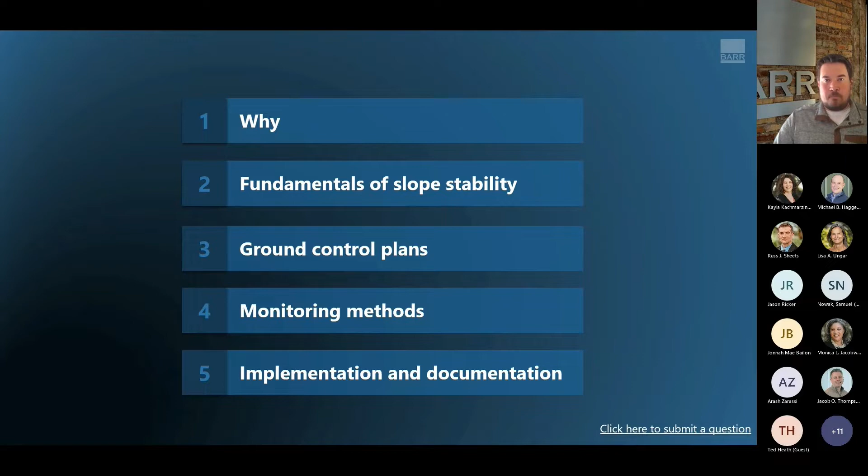As he said, we're going to be focusing on what you need at your operation. So we're looking at your day-to-day staff, your supervisors, your leadmen. We're not going to dive too far into the technical aspects of geotechnical discussions. We really want to make sure we line you up and communicate some tools that you all can use, and hopefully are readily available to you at your operation.

We're going to talk a little bit about the why. Why are we here? Why is it important? Why do we need to be concerned about geohazards with regards to keeping our folks safe? A little bit on the fundamentals, what sort of slope stability issues you may encounter depending on if you're sand and gravel or rock quarry.

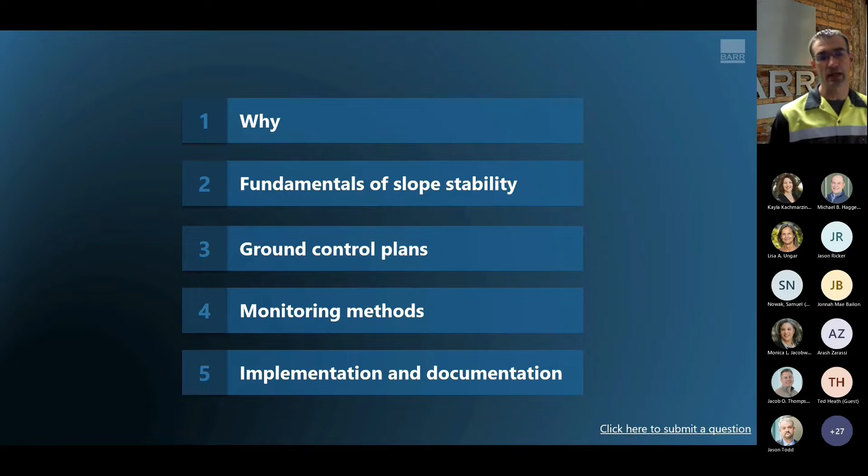Then we'll transition over. Mike will take over, talk a bit about ground control plans and some of the regulatory aspects. We'll share some examples of monitoring methods and then dive in at the end: okay, you've done all this stuff, what do you need to do to implement it and use it at your operation?

So we'll start with some of the why. When it comes to ground control in the mining industry, regardless of your scale, when you're looking at the geohazards of keeping folks safe, we consider that it's not a matter of if, but when a slope failure or slope movement can occur. We may be thinking large scale movements are the ones at risk, but in general that could be a large scale movement down to rockfall, gravel, local sloughing. We see some of this stuff day to day.

There's inherently always going to be some movement as you're exposing ground conditions, opening it up. Usually our bench faces are a little steeper than the natural condition was. We're going to see something raveling off, and it's understanding what's the type and scale of risk we could have from that. Now, the fortunate thing is we can all keep going. We can keep our folks safe. We can continue to mine as long as we have the practices and the controls in place.

We know what to look for, and importantly, when we do see those changes in conditions, we know how to respond, how to react. Is that fixing the instability with some earthwork, or are we just going to berm off, barricade the area, step back a bit, let it do its thing, and then move on from there? How do we mitigate it, making sure we keep folks safe.

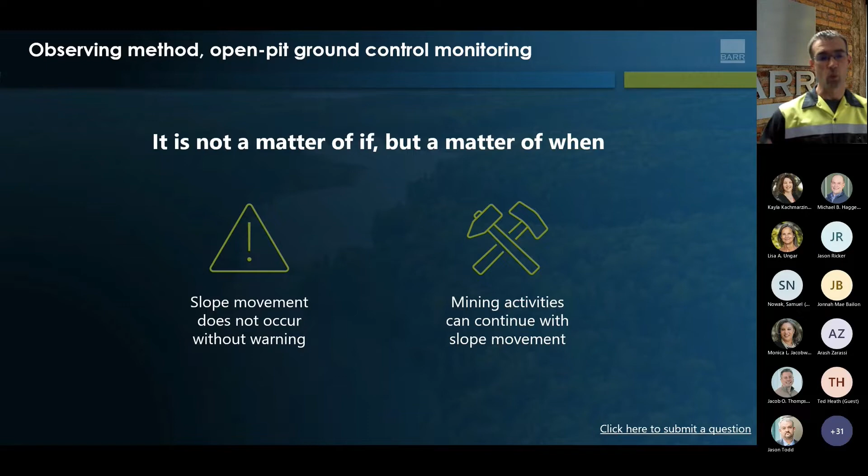The benefit here is with all slope movement that occurs, there's going to be signs, whether it's that crack, the sloughing, the raveling. Now, the one catch is what's the time period? Depending on your ground conditions, maybe that ranges from hours to years, slow moving, large scale. But in all cases, we can keep going. We can keep folks safe as long as we know what we're looking for, we know how to respond, and we have that plan in place for when those conditions occur.

Now, a little bit of an example of a not if but when case. This is a larger scale coal operation, but as we can see here, we've had a significant movement. So it's not just the hazards that slope movement can cause to your personnel, your equipment, your operation, but then it's the impact on the business side of the mining.

So you've developed a plan, you have a specified working room, and you have a larger scale slope movement that pushes in, reduces your pit width or your working area. In this case, it essentially creates a pinch point because it's a narrow pit. So folks' only way in or out is working laterally. But you see large scale movement here, the pit wall moved out at least 100 feet, pinching that pit floor.

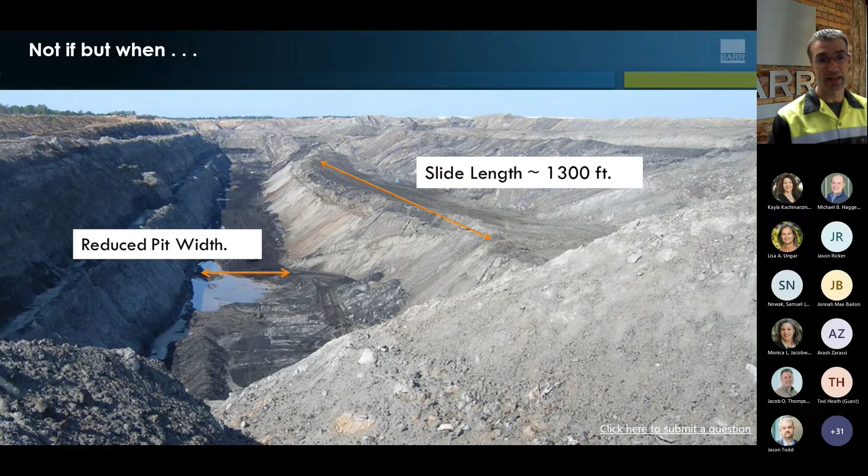Then you get into the regulatory aspect: even if you were aware of it in advance, if it is a significant movement, you can get MSHA involved. In this case, they issued a K order on the operation, which, although no one was hurt, specifies their control of the process, what you need to go through and what they need to approve before you can safely get back to operation. Now, as I said, the biggest thing with ground control issues is what type of rock or soil you're dealing with.

And this can bring in kind of a case-by-case basis. There's a lot of geographies that I know many of you in attendance may be working in. And it's knowing and understanding that, okay, maybe some of the issues, some of the risks, some of the methods that maybe at some point in your career you saw applied at one location, one operation, maybe they don't entirely fit the next one. There may be something that'll work better. And that's hopefully what we get into, just the methods that you can try and plan ahead prior to a ground event occurring, trying to keep it from being an unexpected impact on your operations.

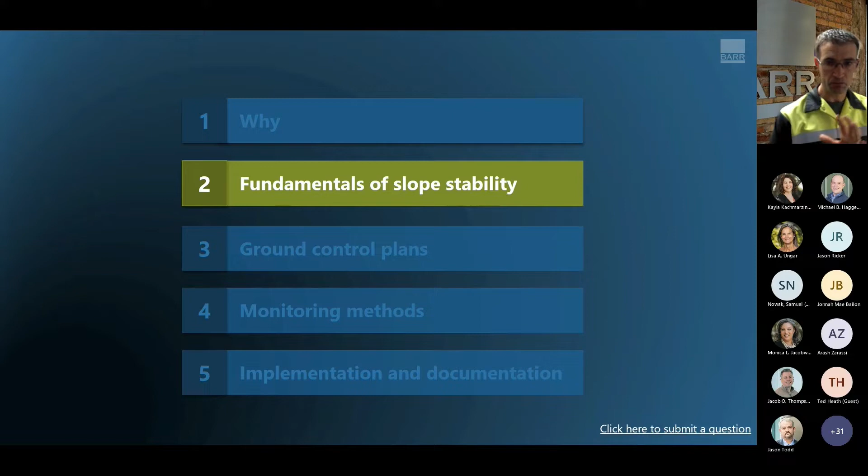So now we're going to jump into a little bit of the fundamentals. And like I said, we're not going to dive too much into technical, but we just want to set the framework for, well, why are we here? Why are we talking about this? Why is this important to you?

So when it comes to designing any size pit, general concept is we know there's more minimal exposure compared to, say, a large earthen or concrete dam, a skyscraper. You get into some other industries, aviation, where failure because of that exposure to the public is just not acceptable. The public expects everything to be safe, stay safe, no issues. And an aspect of that is your general person doesn't know what to look for, say, in a dam inspection.

Whereas comparatively, mining industry, we've got a lot of pits. Conditions are constantly changing. We're either expanding, laying back a pit, or we've mined out an area, closed it, reclaimed it, and we're on to someplace else. Maybe depending on the size scale of your operations, maybe it's a few months to every couple of years. And you have the equipment there to address issues when they occur.

And the staff, that's part of all our MSHA training, is ground control. What do we look for? Make sure we get it reported. So although the risk and the probability of almost certainty that you're going to have some size aspect of failure, you have a lot of the controls in place to make sure it's not going to have an adverse impact. And this is an important key.

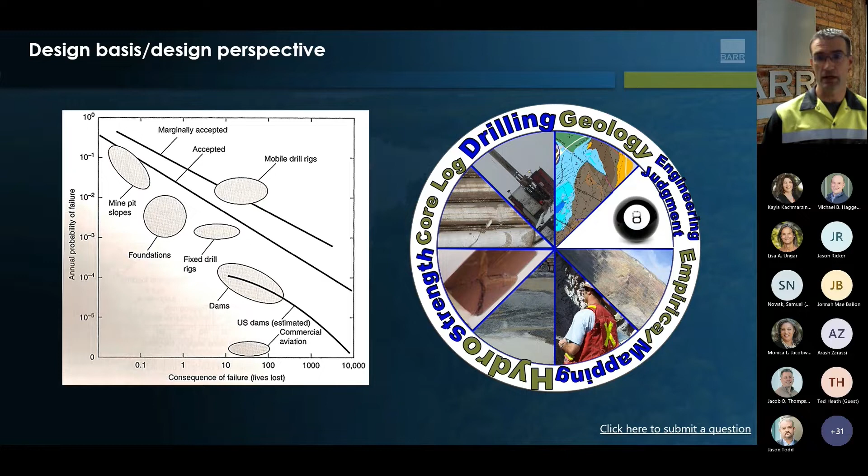And then, what's not shown here is just the operation. Well, how do you drill? Do you need to drill and blast? How do you drill and blast? What kind, size, type of equipment are you using to excavate? Just any number of these factors that can impact what we're doing.

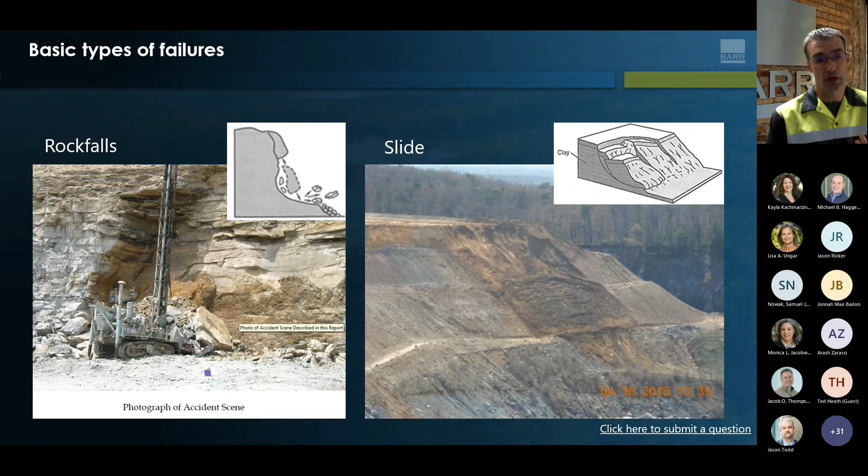Example on the right, more of your soil, granular based material, just an overall slide slump, waste dump fill material here. A shear failure that can cause that to slide out as it locally tries to develop its own angle of repose if it had been constructed too steep.

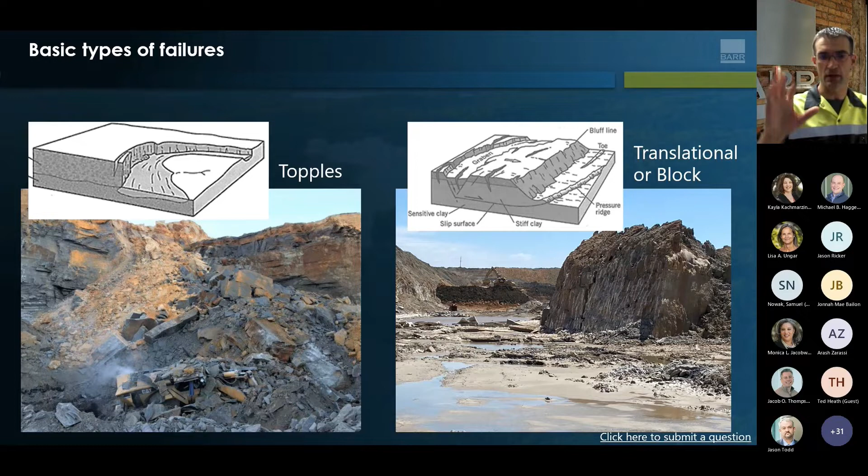And then the last one we'll just show here as an example is that translational large block, kind of like a slide. Example here, we've got some cracks, they actually show heave, where the floor of the pit is starting to try and push up, heave up. We've got a massive block that's sitting on a weak zone, a weak layer, and it's able to translate and slide into the pit, into your area of workings.

So with that, I'm going to transition. I'm going to hand it over to Mike, and he's now going to take this the next step through your ground control plans, as well as some of the regulatory aspects of this.

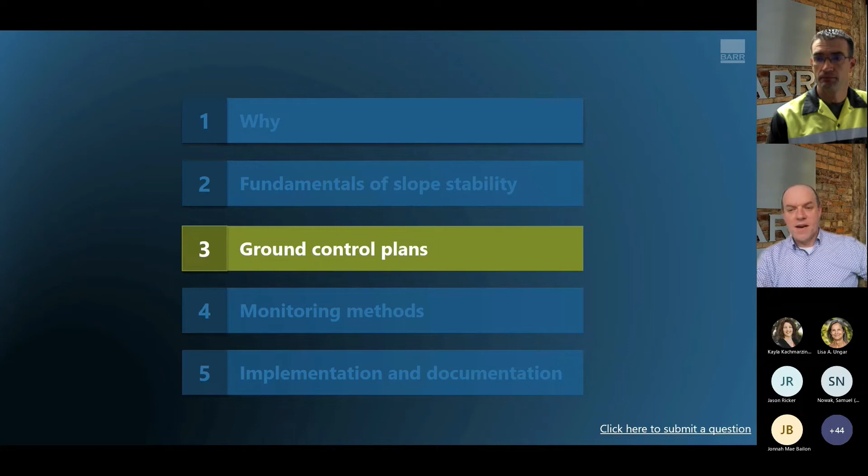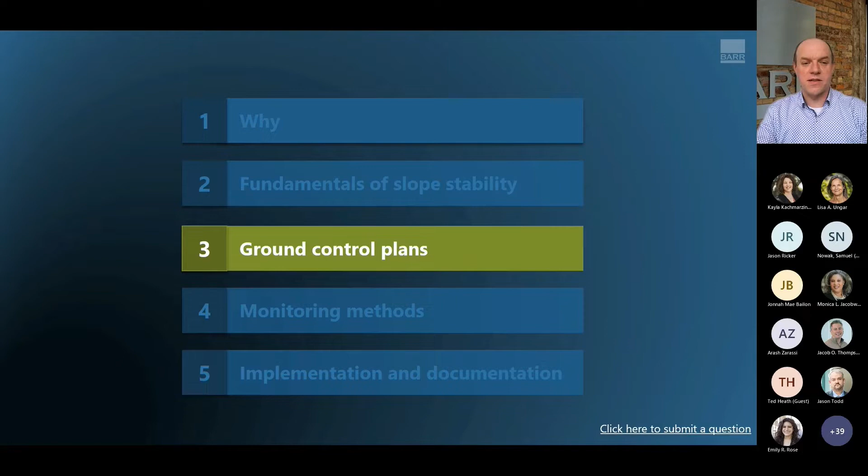Great, thanks, Russ. As Russ mentioned, I'm Mike Haggerty, and I'm going to be talking a little bit about ground control plans and also the first half of monitoring methods that might be applicable to your site. So Russ talked a little bit about the why, what's important with regards to ground control plan and slope stability at a quarry operation. Two big motivators fall into that.

Certainly the number one item is safety, making sure miner safety is prominent in any of the planning of the site. The second one is a good understanding of your ground conditions plays into avoidance of unexpected downtime in operations. So you can adjust depending upon what the operations are to what you're going to see on the site. And those things, as Russ mentioned, oftentimes change as the mine operation has progressed through its ore body or pit. And so it's good to be aware of it so that you can maintain safety, but also avoid those unplanned shutdowns.

And when you look at what MSHA requires, certainly they're looking at it from the miner safety standpoint and some of the CFR language around what's required there. It's certainly open. The bottom line is really you should have a plan in place such that failure doesn't occur or minimize any exposure to safety in regards to that. But when you look at the actual language: each operator shall establish and follow a ground control plan for the safe control of high walls, pits, and spoil banks to be developed and be consistent with prudent engineering design and will ensure safe working conditions. Mining method employed by the operator shall be selected to ensure high wall and spoil bank stability.

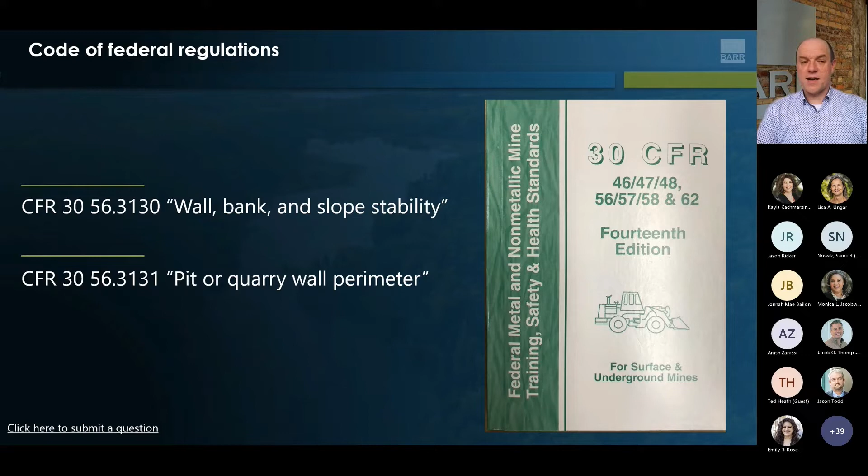So really the focus then is with the operations that you have on site, how are you operating to maintain that high wall stability? Do you need benching? What is the width and height of those benches? Do you need to scale the walls? All of that falls back onto what sort of an operation you are looking at.

Ground control plans are not specifically required for quarries and sand and gravel pits. However, if a ground control citation is written or an accident occurs, MSHA can request to see your plan, or they can require a written plan that has to be developed to abate a citation and lift a K order in an accident area. And so it's good, no matter what sort of operation you are, to be thinking about that. What is best practice? Do you understand the risks that might be at your site? And then what are the approaches to mitigating that risk? Oftentimes that can come down to monitoring, which we'll talk about in a little bit.

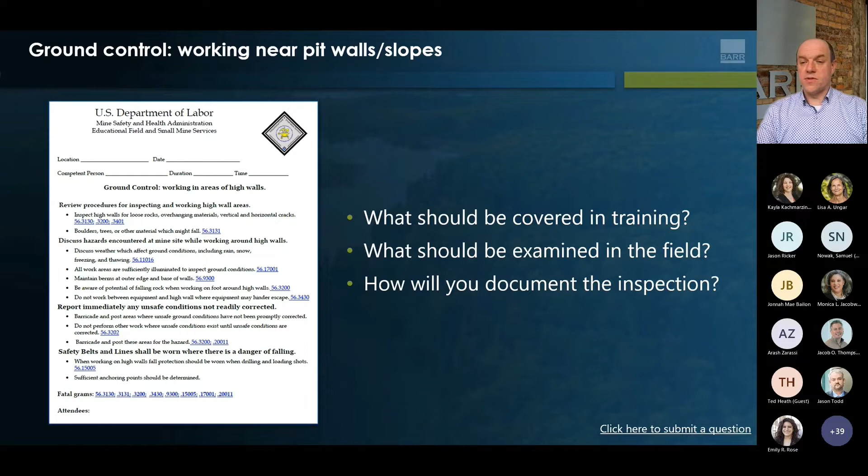So one of the basic things is just good education of site staff, and all sites are required to train staff in ground control hazards. So what to look for, what risks need to be mitigated. So your site specific inspections should cover those same topics. And as discussed earlier, that inspection must be documented. So you want to provide a record of conditions over time, both good and bad. And then when you identify something that is of concern, how and what are you doing to mitigate that? Those are the key things you want to make sure you have in your documentation.

And it's always good to think about this, particularly at a quarry mine site, in terms of risk. And as we have here, risk is really that probability of failure times consequence. If you're a giant open pit, say a copper or gold operation with a main haul road that's coming down, that's going to warrant a higher level of monitoring to get early warning on something negative happening to that pit. If you are a smaller, let's say a limestone operation, and you've got a pit that you don't work in that often, visual observation might be appropriate because there's not a lot of workers back there.

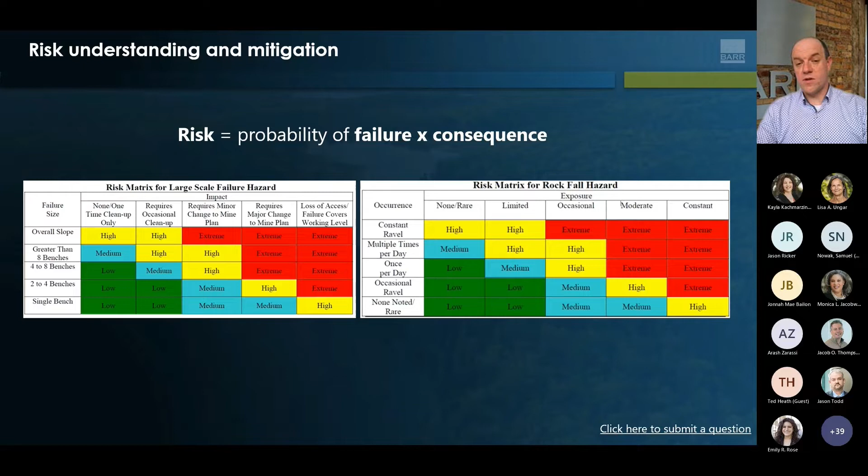You might get some toppling, but it's not something that's of a dramatic risk to either the miners or the operation. So you have to weigh what is the risk to any particular part of your site, and then you can start to develop a basis for why and what sort of monitoring you may want to employ at that particular spot. So with that in mind, there's a whole host of monitoring methods.

I'm going to talk through what I'll say is probably the more standardized ones in terms of visual observation, things to be looking for, qualitative type of awareness, and then I'll toss it back to Russ, and Russ is going to walk through some of the more quantitative types of measurements that can be done on operations.

So talking about slope deformation monitoring, as was mentioned earlier, a lot of times there are warning signs that are happening before a significant failure can occur. And it's good to be mindful of what those keys are, what those signs are, so you can take action. And so you really want to transition from qualitative data using photos and videos to document conditions and try to quantify site conditions and measure the site features. Those are the things that run the span of what you can do at a site.

I'll talk a little bit about visual photographs, drone, LiDARs, and then, as I mentioned, Russ will talk more about the monitoring pieces. But there's a whole host of things that can put you in a good position to keep monitoring on your site. The basic of these is regular routine visual inspection of the slopes. A lot of times this will be, at the beginning of each shift, the pit foreman may be looking at things and documenting them.

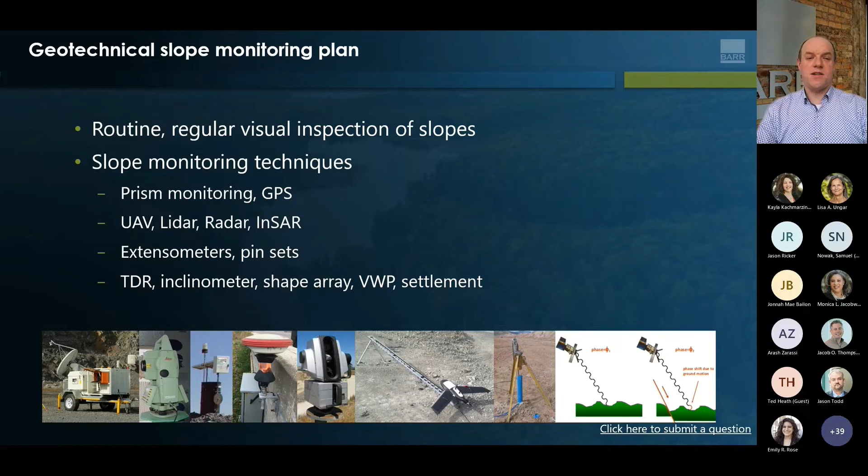So that's your eyes and ears, someone who sees that ground every single day and has a pretty good sense on if conditions are changing unexpectedly. That's a really good line of defense and something everyone should be educated in. But then there's also another whole host of items that you can use for slope monitoring, everything from surveying of prisms, GPS, aerial drone, LiDAR, InSAR, and then you get into some of the specific instrumentation pieces that can be used, like extensometers, inclinometers, ShapeArray, those sorts of things. But it all really starts with the routine inspection or the visual inspection.

When you look at the whole host of instruments, there's no one item that does it all. And that's important to keep in mind, because you will hear a lot about various types of instrumentation. They're all good in the right setting, but they may not be the right one for your site. And so it is important to understand the host of what is out there and the impact and the costs and the benefits of these things, and then use that to weigh in on what fits best for your site.

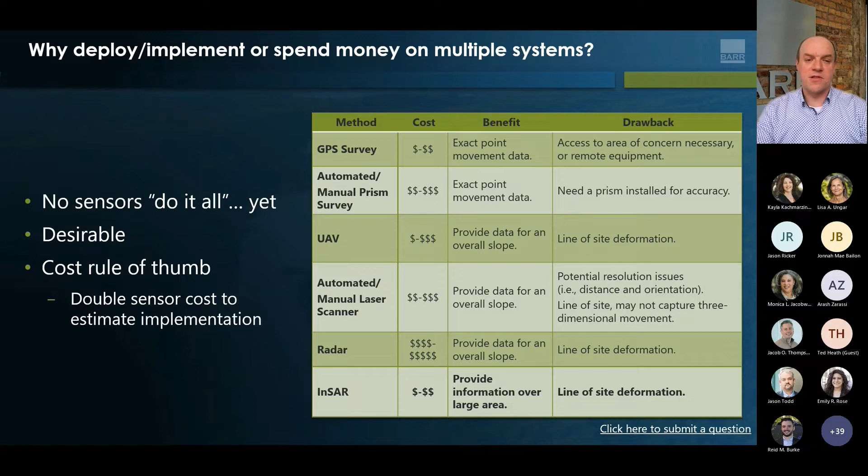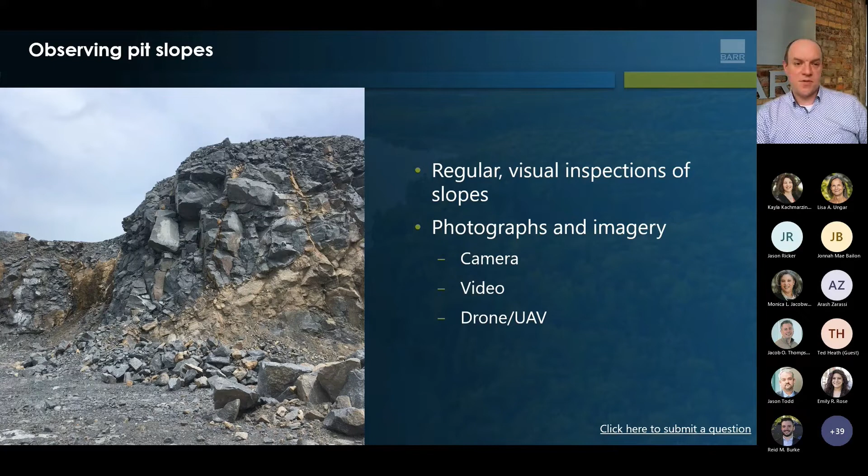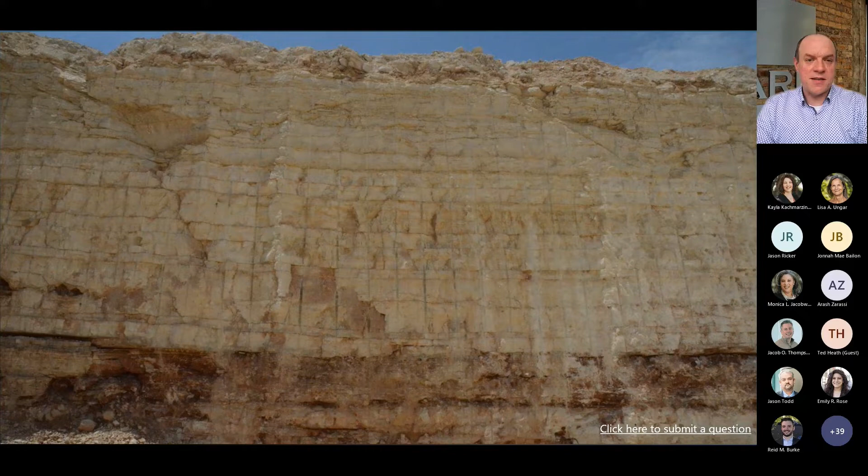A few examples that we've got here. This is a massive limestone high wall at a site. You can see bedding planes and fractures. You might get raveling from something here. You could have toppling or rock blocks falling. And so those are some things that you'd be looking for. Voids or karst, you can see the bedding planes. Those are the sorts of things that on a visual inspection day to day, you can see if there's been some changes that pose risk to the site.

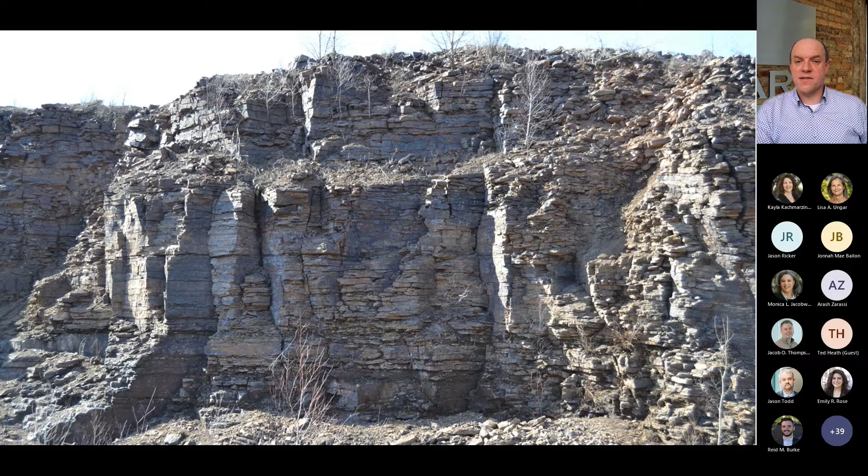Now, by comparison, this is a picture of a high wall from northern Minnesota. It's different than the limestone because there's a lot more fracturing, there's a lot more structure. There's some weathering at the top. And so looking at the top for toppling rocks, things that are coming down, the higher degree of fracture of the rock is something that would raise a concern or something that you need to pay particular attention to.

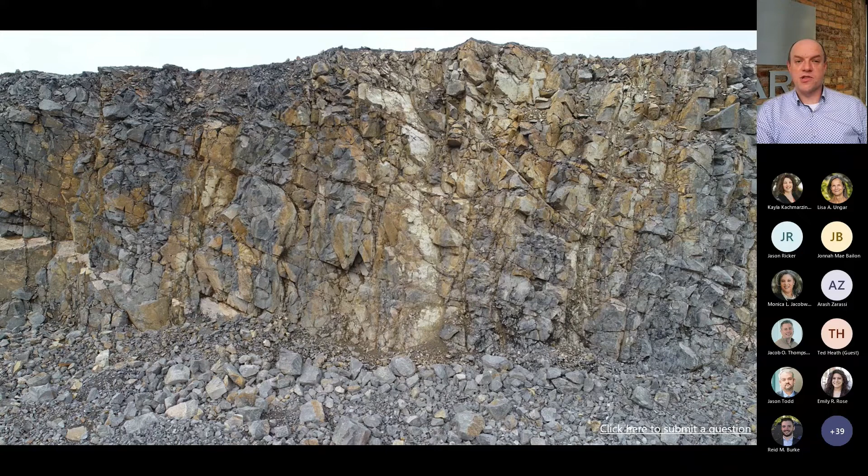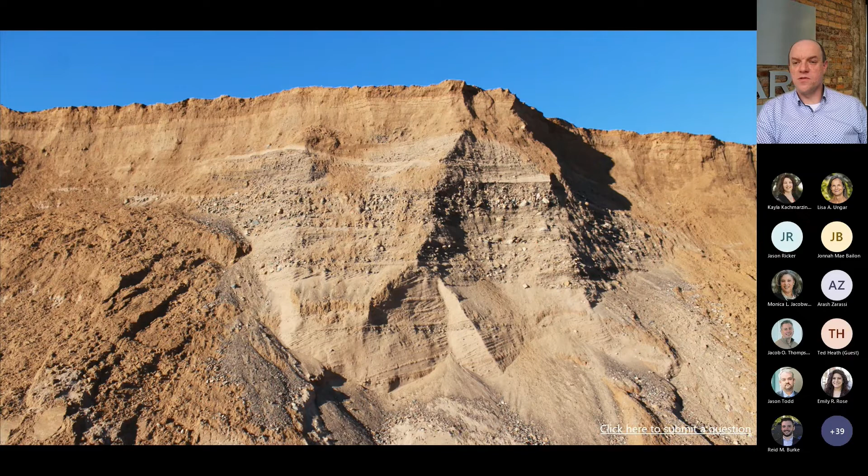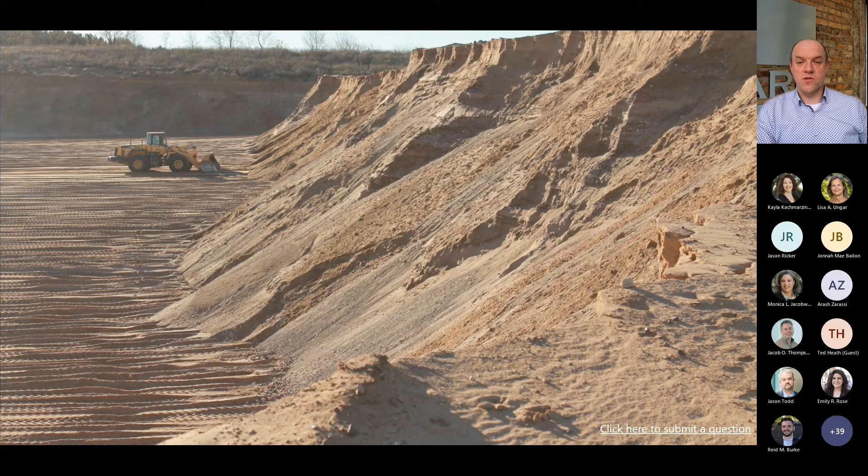And that, again, it could be either over steepened or it could be an area of higher risk that with time might start to unravel on you. And other than that, it's fairly uniform all the way down here. But this sort of steeper slope at the top is something you'd want to pick up on your visual inspection, because that can change with time and it can be a warning sign. So it's good practice to document face conditions like this. Is the material creating a good muck pile to dig from, or are you observing more near vertical conditions and potentially undercutting that with operations?

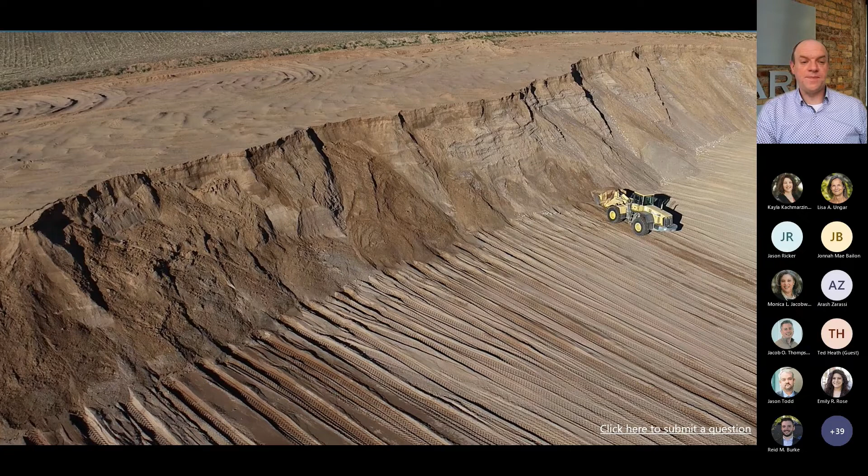In a harder rock type of operation, you could see some backbreak, potential impacts from blasting that may have loosened areas, and help you identify areas that need to be scaled. And then same thing here, it shows a few other things. So first, again, you get a better perspective on where there's fractures developing at the top of your high wall. And that's something that could pose a particular risk.

And here you can see the changes in the geology really well, the steep top part, the fanning out, some of the different materials. But the third item to note, and is important to think about when you're laying out your visual observations, is the shadowing. So this shadowing, in this photo, it's hiding some of the features. And so one thing that's important to think about in your planning is, get a look at different times of the day. Make sure there's not an area that's completely hidden.

But on top of that, it's good to be consistent from day to day as well, so that you can see things from the same angles, and make sure that there's no changes that are there but just going unnoticed because of the angle or the time of day that you're doing your inspection. Ideally, you want to have well-lit conditions, it makes it easier to compare to the past days. And this just shows you that giant shaded area out here. Hard to see anything on that wall, so you'd want to catch that at another time.

Here, there's some shadowing that, again, a different time of day might expose what that looks like. And same thing here. So just some general rules of thumb to be thinking about. And then if you go back even further, one step, you can see that wall in the background here. Again, with a drone, you kind of get an overview of the site. There's a few other things that you can think of. So it gives you a better perspective of the rolling topography and where surface water may be concentrated to, if that's coming to the top of a high wall, or causing issues with water spillover on your high wall or anywhere on your site.

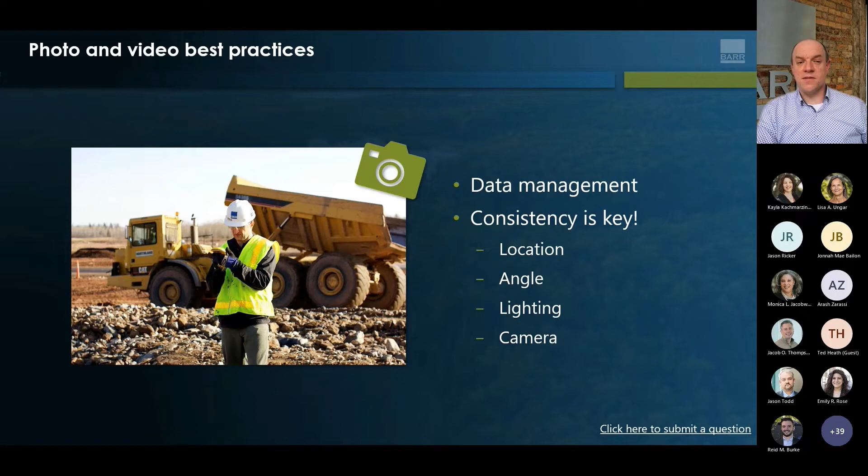Now, with that, I'll toss it back to Russ here in a second, but the big thing is data management, and your consistency is key on those visual type inspections: location, angle, lighting, camera, all things you want to think about and consider when you're laying out your visual observations. Russ?

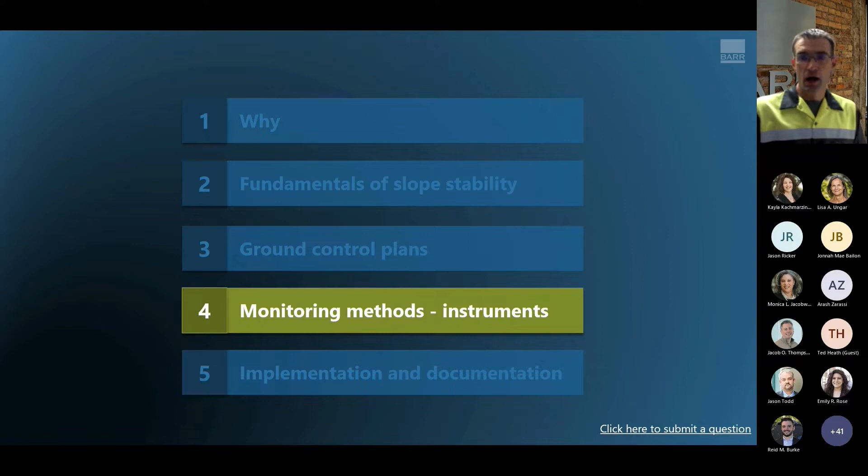All right, thanks, Mike. So Mike has taken us through conceptually what we can do, particularly the visual inspection, which is the base of anything we're doing, just getting eyes out, looking at your operation, looking at your site, looking at your geology conditions, and just tracking what's going on. He also talked about some of the toys, the instrumentation, the equipment to try and quantify this, and they all have their benefits, drawbacks, costs. Nothing's entirely perfect. You really need to look at what you need for your situation.

But I also want to point out that we're not saying that as soon as you get off this webinar, you need to call up your vendors and say, I need a robot, I need a radar, how do I get InSAR? You don't necessarily need to do all that. It's just starting with understanding, doing what you can, and then we really just want to make you aware of what tools are out there.

So as you're starting to see those changing conditions, or maybe conversely, your quarry or sand and gravel operation is in a more urban or closer environment, you're getting close to that property boundary, and maybe part of it isn't so much that you've got a hazard risk to your own operation, but it's just ensuring, verifying that you're not impacting whatever happens to be next door around you.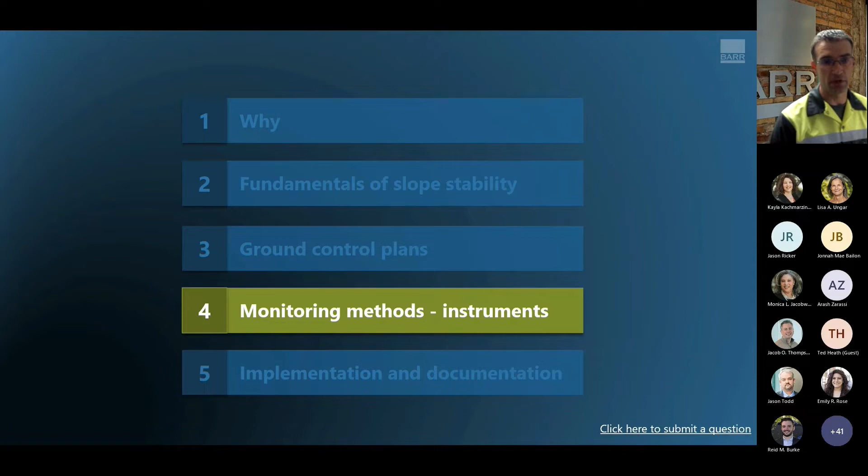So anyway, we're going to go through some pseudo case study examples to show you what some of these are, what some of the data looks like, and like I said, just make you all aware of some of the tools out there. So if we take it from just the visual inspections, very rudimentary, what can we do? How can we quantify movement?

The image on the left, you can't really see it, but we're going to talk pin sets. So whether it's a stake, a nail, rebar, something you pound or install in the ground. We've got some flagging material on either side, and obviously there's a crack. There's signs of movement here, but it's just placing two fixed points in the ground. In this case, a tape measure of some sort, to be able to measure across.

Maybe you've got multiple pins, so you can try and triangulate and try and gauge, understand which direction things may be moving or accelerating greater than others. But just a basic, let's see what's moving, let's put a distance to it. I mean, we'll simplify this even more. It's what matches a visual.

Example: years ago, I was called out to go look at a pit and meet the foreman up there, but I beat him to the site, and I find a rolled up newspaper magazine with some paint or marker on it shoved down in the crack. And I'm looking at it, foreman comes up and he says, well, this is what I had with me. I figured that if this happens to be rapidly opening up, either that newspaper will unroll or it'll drop, and the marker I had on it will be a hard set visual, other than just comparing photos, that something's changed.

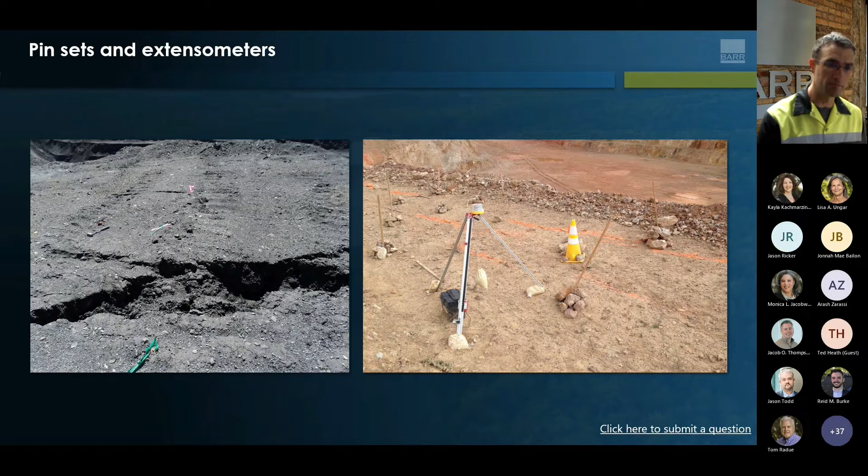Now, this one is a bit more manual. They make automated telemetry ones. I've also seen simple homemade ones at mine sites with some angle iron, steel pipe tubing, where they build the same tripod and put a counterweight attached to a wire on one of the angles. So as things pull away, the counterweight pulls up and you can measure that. So like I said, there definitely are commercial tools available out there, but there's also ways to at least initially start with, well, what do you have at hand?

What can you use? Now we talked a little bit about survey prisms and survey total stations, whether it's manual, where you have a surveyor technician, someone who can go out and shoot these on a regular basis, to the opposite extreme where there are software programs that run this all automated, robotic-like, and you can have them shoot these survey prisms on specified intervals.

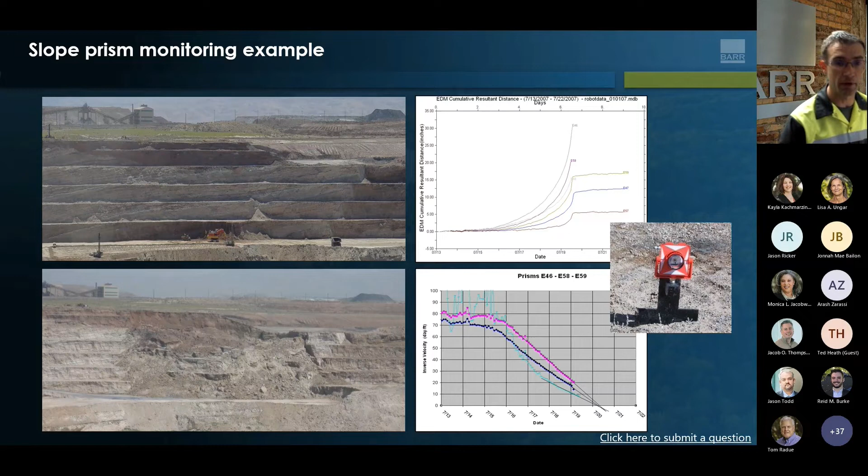GPS monitoring. Just first off, be wary of just your basic handheld ones, or even using some of our phones to try and get points, because we know there is a bit of error, particularly in elevation, on those.

But if we do have higher grade GPS survey monitoring equipment that you can use out there, then you can install your fixed points, maybe they're pin set stakes, install a fixed post at some point that you can then put your GPS antenna on, and at whatever interval the case may be, a couple times a year, quarterly, monthly, it depends on the risk, what you have around you, go survey that in, take that point,

and then update it, just track it, whether it's a basic Excel spreadsheet or something a little more involved, an Access database, or some other software coding, commercial software where you can upload this data and spit out your charts, your graphs, tables to show you what change has occurred, and again, at what rate.

Drones. Mike showed you some great pictures of how you can use these to get the visual, be able to get the pictures, images, video, see what's going on, and then you can compare those over time. Likewise now, through use of either LiDAR or photogrammetry methods, depending on the type of drone, some of you may be using these anyway to survey, update your surface topography, maybe check volumes, either volumes of material remaining, volumes to be mined, and using it for your mine planning purposes that way.

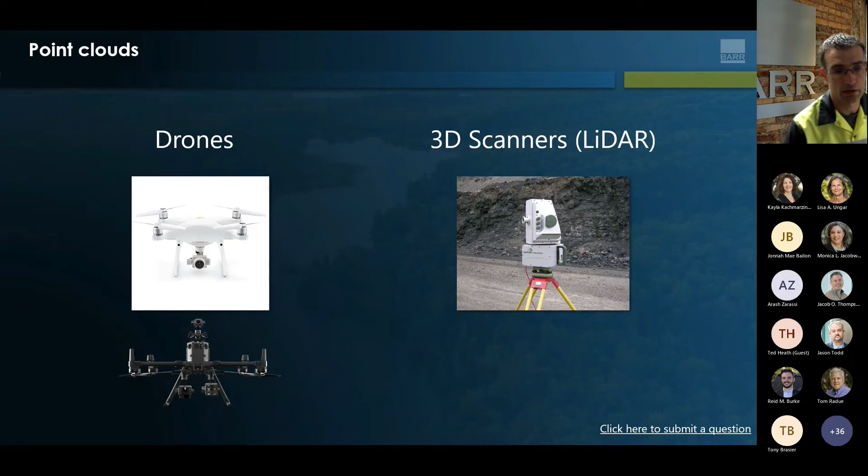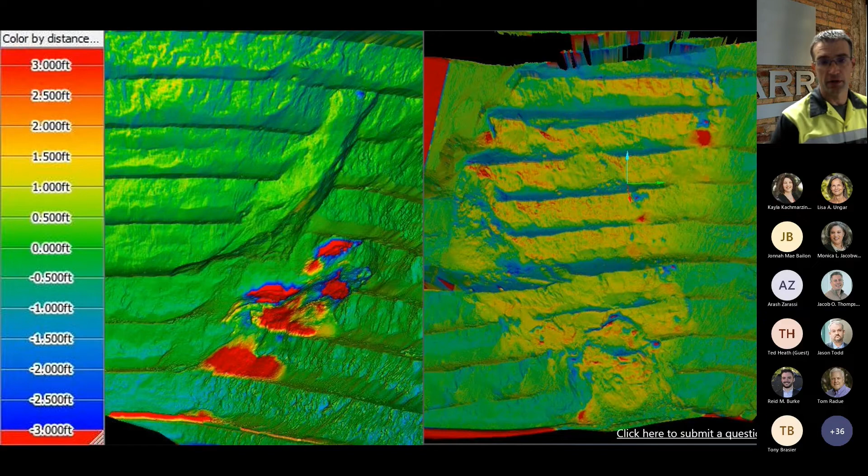Structural failure example, a large wedge on the right where the toe's already starting to push out. But again, you can use some of these tools to look at overall large scale what's going on, what's the limits, where do we have concern of sloughing, raveling, or material movement, and potentially what are those bounds, and just be able to quantify them.

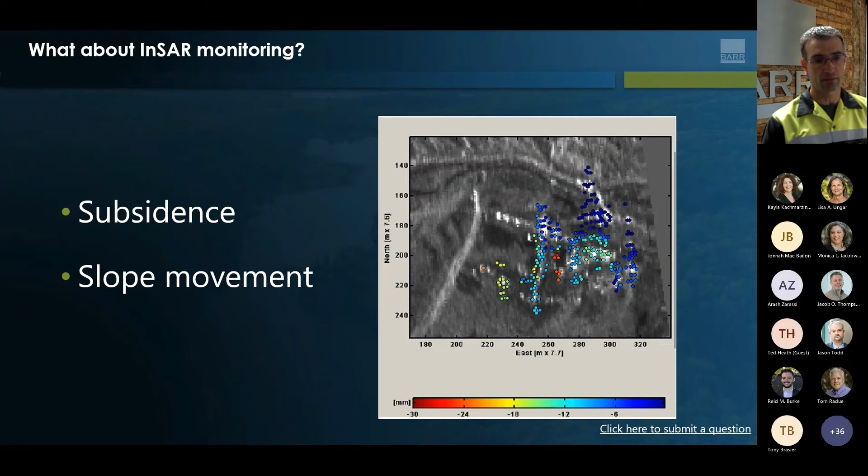Hit on this one quick, InSAR, use of satellites. Becoming more and more widespread. Some items to watch for, be careful here, is vegetation, and then what your satellite intervals are, what's your frame of reference, really what's that angle versus what the potential angle is of movements. So it is beneficial, it is useful, but it's not going to help for a day-to-day active aspect of your operation, but potentially areas that are looking for reclamation or need to stand there a bit.

Just talking inclinometers quick, everything we've talked has been surface. Surface examples, see what's going on. Are you impacting your surroundings? These ones you would actually need a drill, create a boring, and install some inclinometer casing, which is special grooved casing where you can either manually or automated run an instrument up or down. If the slope's moving, the casing will move. So as you survey it with that instrument, it's going to tilt different if the slope's moving.

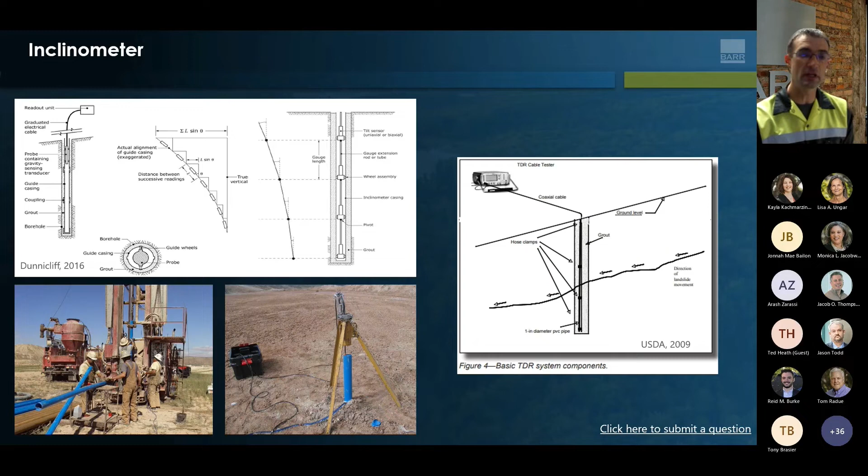Others, TDR, just kind of like looking for a fault in a wire. You just grout a cable in a hole, and if it's moving, it's going to pinch or shear that cable. And just like you were looking for a failure on an electrical line, you can at least try and find out what depth something's moving. Now, these are more involved. You need some form of drilling, but they are tools if something's moving, something external to the operation is occurring.

So now I'm going to take us through, what can we do with this now? So we've gotten our photos, gotten our images. We're able to quantitatively collect data, collect information. What do we do with it? It's basically finding what works for you and being consistent. If it's just a lot of photos, file organization, folder structure, years, dates, times. If you've got a larger operation, make sure photos are separated out, so if you need to go look at one, they're not all intermingled. Or if you're collecting data, is it equipment that came with software that does it for you, or do you need to track the data in an Excel sheet, simplest case, and see what's going on?

But where that leads to is making sure we're not just taking photos for the sake of taking them. We're trying to understand over the course of our operation, are there changing conditions? Is there something we need to be concerned about? Have our operators recognize that something's moving, and report it back to us. And well, what do we do? How long has this condition been in place, or what's changed? Is it accelerating, or is something going to occur, and what do we do about it?

So the best practice, maybe the last decade plus now as it's grown into the mining industry, is the use of a trigger action response plan. In simplest sense, remember in elementary when you'd regularly do fire drills, alarm goes off, everyone gets up and goes. Well, that's really what this TARP is. It's you, whether you're the owners, managers, technical staff, or operators, developing a plan in advance that, okay, we have this occur, this movement, this acceleration.

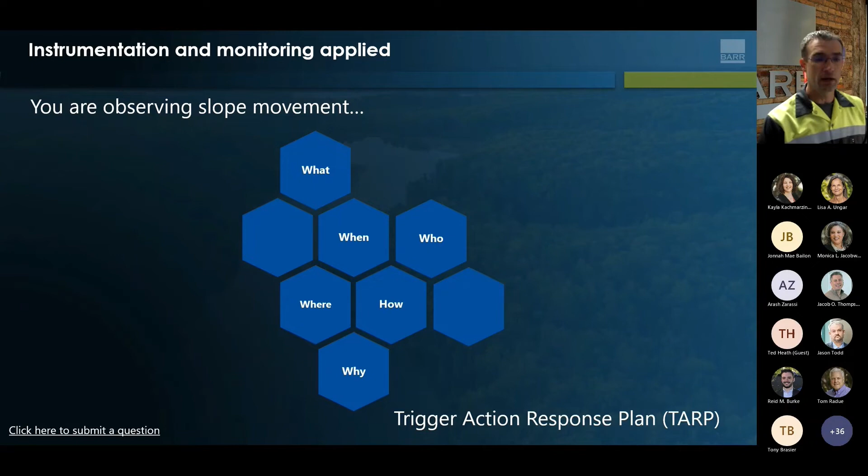What do we do? In those moments where something's occurring, you get a little bit excited. Folks may get a little foggy on what we need to do. You can't think at the moment. Well, at least it's already laid out. You can pull the page, the table, the flow chart, the binder, whatever you have, off the shelf, look through it, and you have this plan: what's our thresholds? What causes us to initiate this plan? What are those procedures? Do we just block it off, barricade it? Are there any external folks we need to let know?

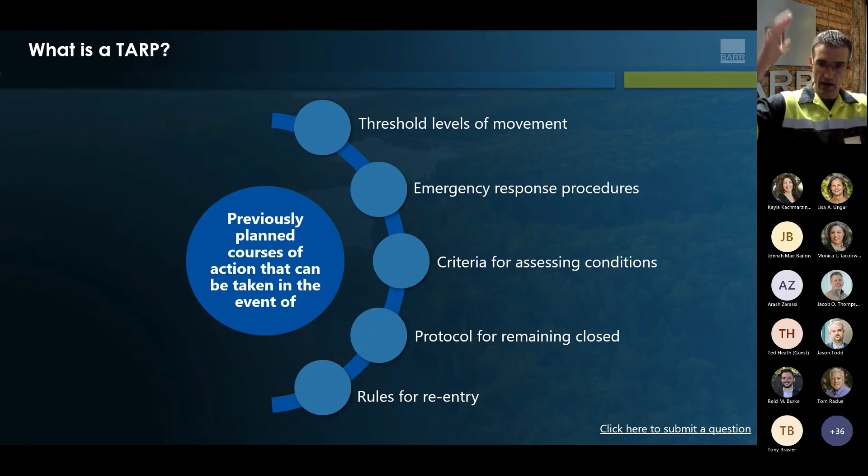And then how do we assess? Okay, how do we evaluate? What do we have? What's the risk? Is it getting worse? Is it changing? What do we do? And how long do we then keep the area closed? Until it's been either mitigated or we brought in other folks to come in and take a look, and then after that's all said and done, there's got to be a specified plan for reentry. So it's not just, oh, it looks good, let's go. It's making sure everyone is also on the same page and has a voice and ensuring that it's safe.

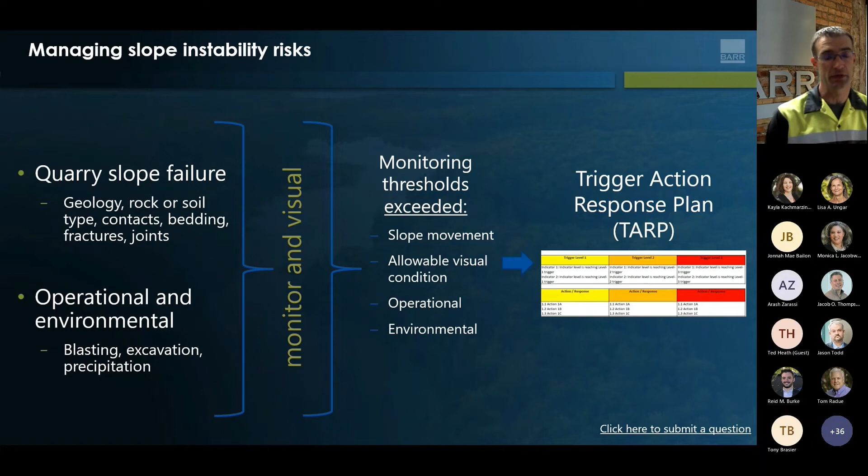So these can take on basically any scale. They can be triggered either by the geologic conditions we talked about, or maybe operational or environmental. You have a large storm coming through, rainfall, and you know you've got an area of the pit that's sensitive to that. If we expect X inches of rain in an hour, a day, whatever, that may be enough to be your basis. You monitor visually, keep track of what's going on. Those thresholds are exceeded, and whether it's a table, a list, a bullet point, there's no specification here. It's what fits your folks, your operation, determining, okay, this has occurred. What do we do?

Let's finally just talk a bit on key guidance. Hopefully we've been able to share some things for you guys to at least think about and consider if you get in those situations. MSHA has a lot of great training info on their website. NIOSH does as well, with a lot of research looking into safety of miners and operations, as well as various industry-focused societies and associations that put out a lot of great stuff. Or if you're in an area nearby, a college or university may have done some research or studies and be able to provide you with some information.